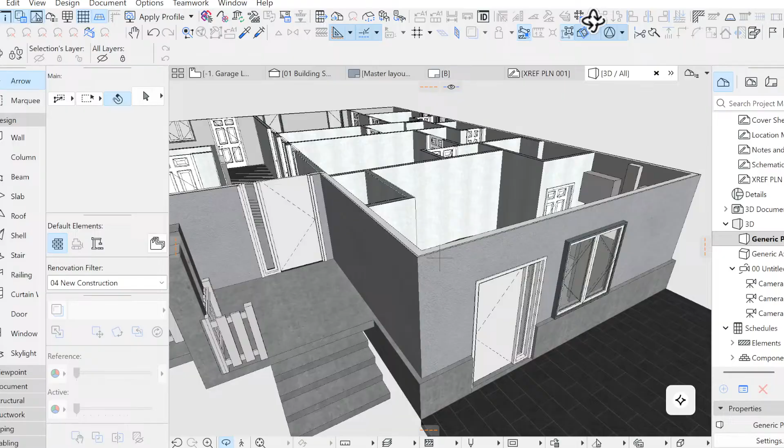So let's actually start designing. That's where the fun part is. So the fun part would be, let me do a quick switcheroo. Okay. All right. So we are here on the model. So this is the home. I am still developing everything. You know, it's missing a wall, missing things, missing finishes, but overall, this home will be transformed.

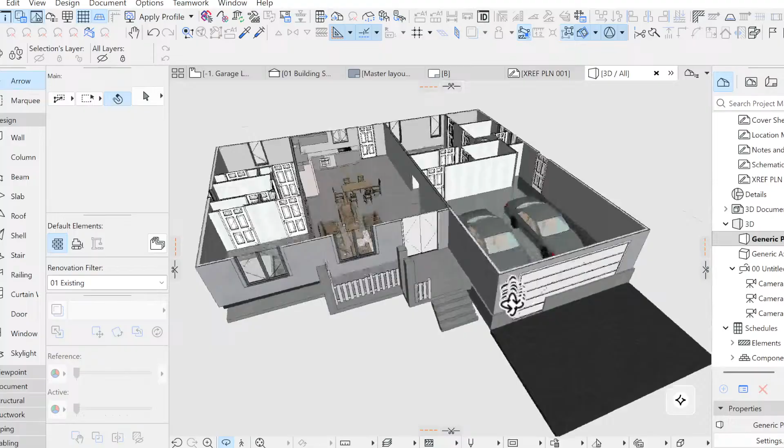So right now, this is where we're at, the end product. But if we were to change the renovation filter to what is existing, this is the home before any changes were made. So as you can see, there's a garage. I need to fix that. And let's do a cut through real quick. So we have a 2-car garage, and then as you enter the space, as you can see, we have those multiple floor layers.

I'm going to fix that. I think one of my floors is on the wrong renovation filter, but that's okay. So we'll just turn that off. That is supposed to be new construction. So as you come in from the front door, you have your living space, you have a dining space, and your kitchen. And then, of course, we have bedroom number 3.

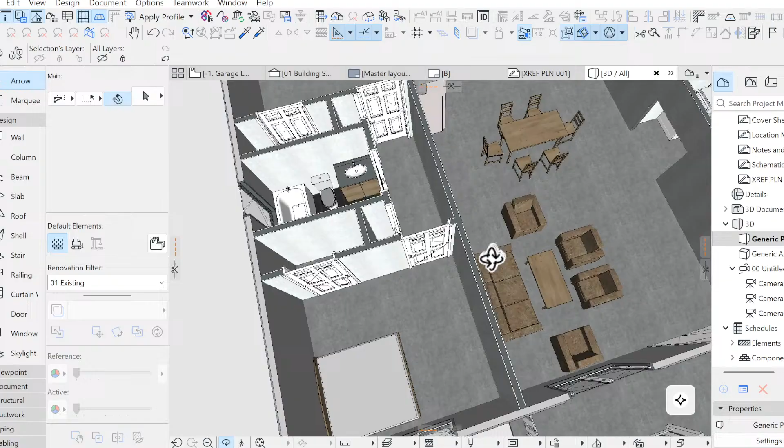Some of my filters did not get saved, and that's okay. It's a quick turn on and off. And then this door, let me orbit around here. There should be an opening. I don't know what happened to my opening, but we'll fix it. But there's an opening here that takes you to the bathroom, and then the bedroom, kitchen, and bedroom number 3, and number 1, the main bathroom.

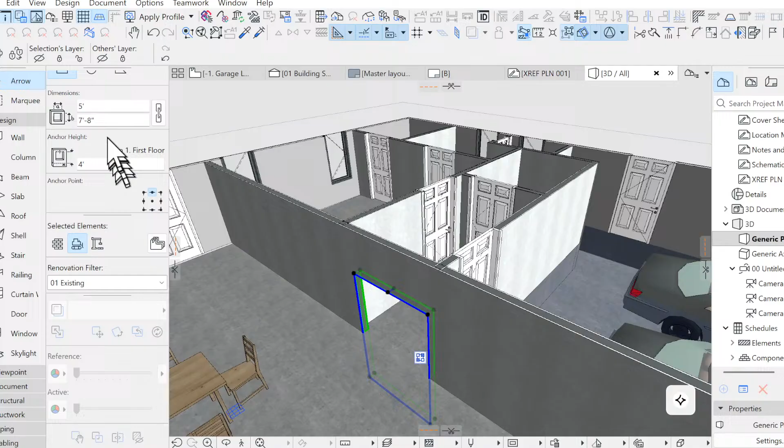And then this here is actually where the laundry room is, but we are now putting that under the new filter, the renovation status. Yep. That's my wall opening, and it got tucked down. Let me see here. That's 8. It's probably 6'8 for a typical door opening.

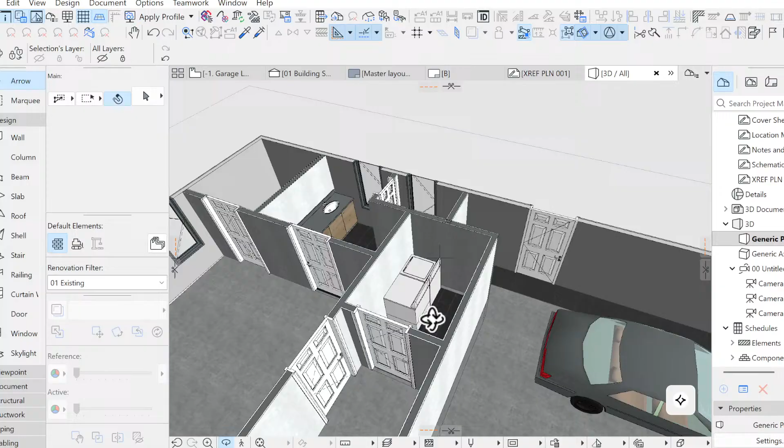So you come down this hall. And you enter through this door here into the main bedroom, and then you have the door to the bath and the door to the closet, and then this door takes you to the laundry room. I'll have to rotate that, and then this door takes you to the garage.

So the garage actually steps down, so the garage is actually sunken down per se. So I decided to kind of keep that feel because most garages have steps. Maybe not as many, but if it did, this is how it operates. So most of the time garages are lower to keep water out, and you want to have the house elevated. And this part of the home will most likely be a crawl space.

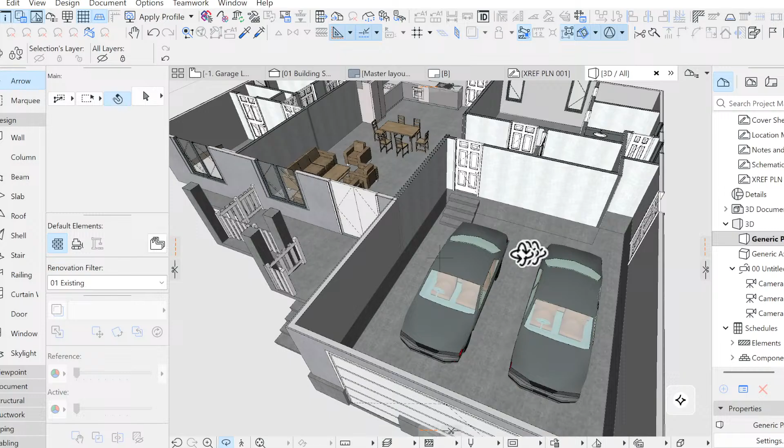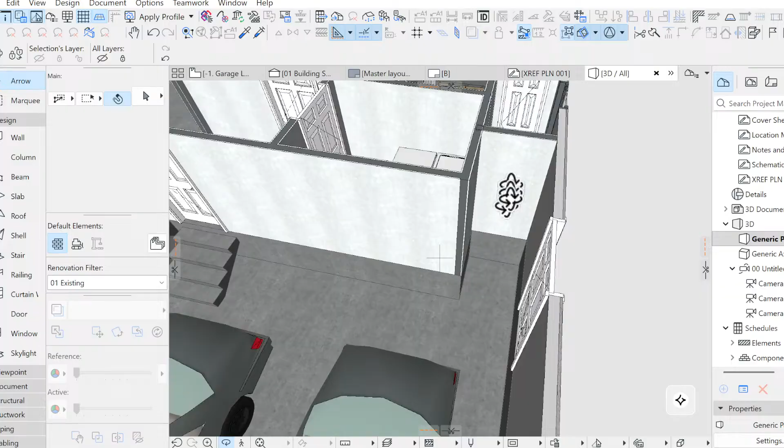And then the garage has this linen area here in this corner, when you enter from the outside on in. So this linen area, I wonder if it will show, but it's actually the new bathroom. So, let's see. Whoop.

So if I were to change my renovation filters to new construction, this is what the garage is now. So the garage, I decided to create a studio-like entrance. So you have a studio here, the door. This is the closet, the one bedroom, and then within that same space, which is very, very tight, is a kitchenette and the bathroom.

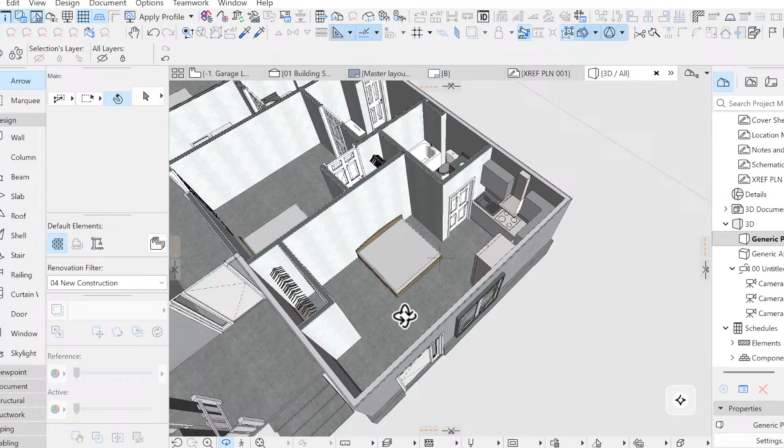So in theory, this section here is separated from the house. They have their own private entrance and exit, and they have their own kitchen. So it's very secluded from the whole home. But if you were to enter the home, the main entrance here, and then in the last iteration, the stairs, the entrance was here. So we need to close that up and make a new entrance for the room to enter here.

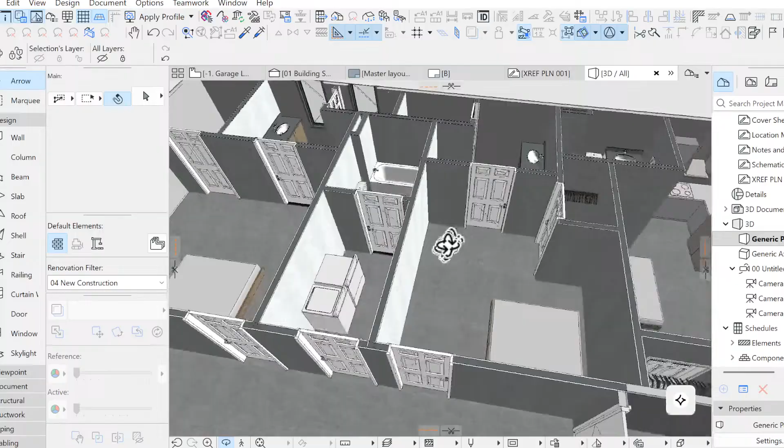So we're gonna utilize this hallway for the laundry room and also the shared bathroom for the other bedroom. I'm still debating if I like that configuration, but I think it works for now. And this is where the bathroom is. So we have the toilet, and it mirrors essentially the owner's suite. It very much mirrors the same layout.

And then all of the plumbing is relatively on the same side of the house. So that's also a win for us. It's not as much work to do. So let's hop into the floor plan and let's just vibe out. That's all we're gonna do tonight. Just vibe and make more floor plans.

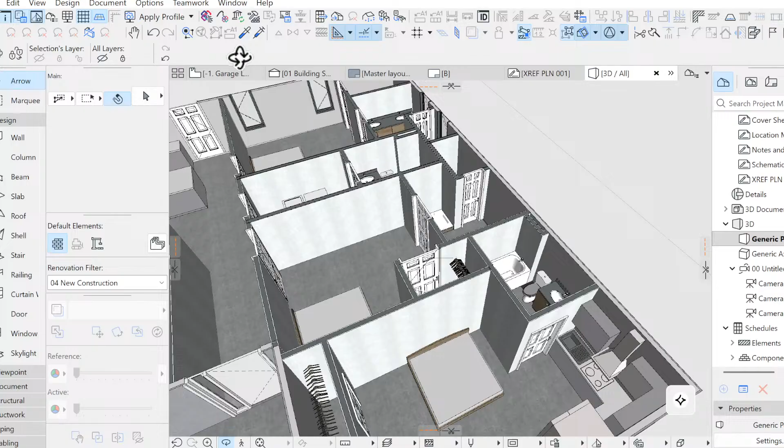So this is our garage level. When I say the garage level, this is actually the level where it is sunken to the ground. Let me turn on my markers. Let's see. So if we were to make a section cut through this garage, this is actually how it looks. So you have the driveway, and then this part of the studio is on the ground floor of the garage,

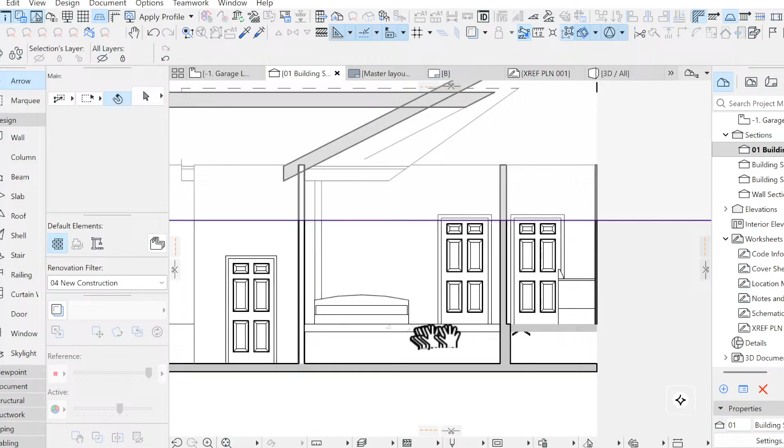and then I elevated the other side of the garage to be on the same plane as the rest of the main home, so it's equal. So you're not walking down to the bedroom. So we raised the floor up. As I start to draft, let me put it on the right layer. Sometimes I just go really fast, but now I kind of know what I want to do. I can now assign it correctly. Sometimes I just model, but we'll fix that.

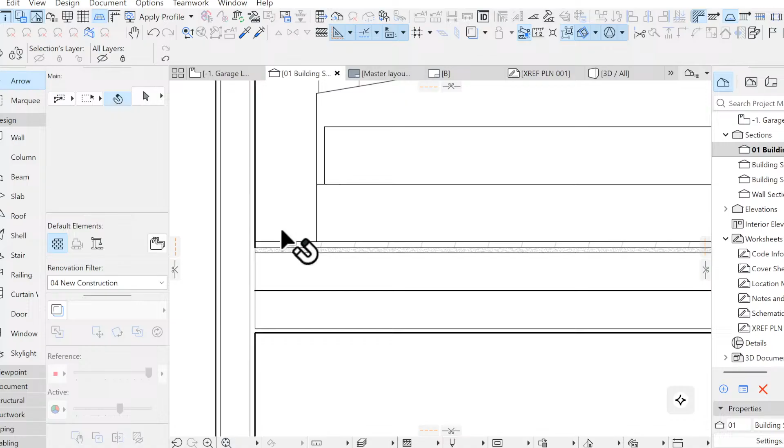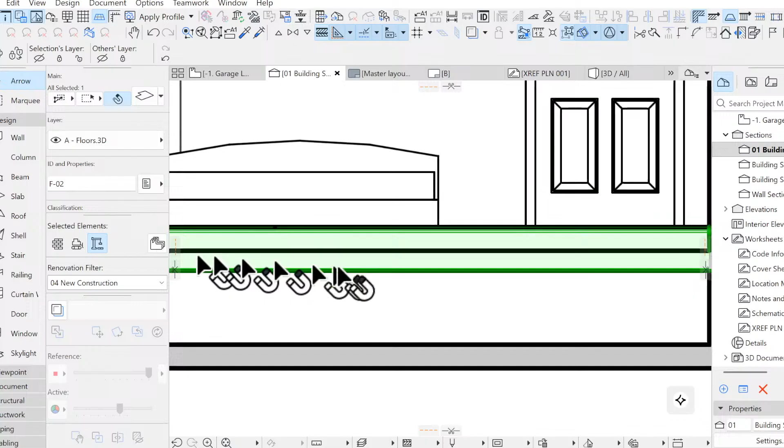So this is actually going to be a composite, an assembly, a floor, and we're going to do flooring and gypsum, and that would give us the right thickness. And then in another view, I will show the floor joists. So right now you can see the subfloor. Let me turn on my line width. So you can kind of see the subfloor, and then this. I'm not exactly sure what that is. It's the same thing, but why is it showing? There's two different floors. Let me see. There we go.

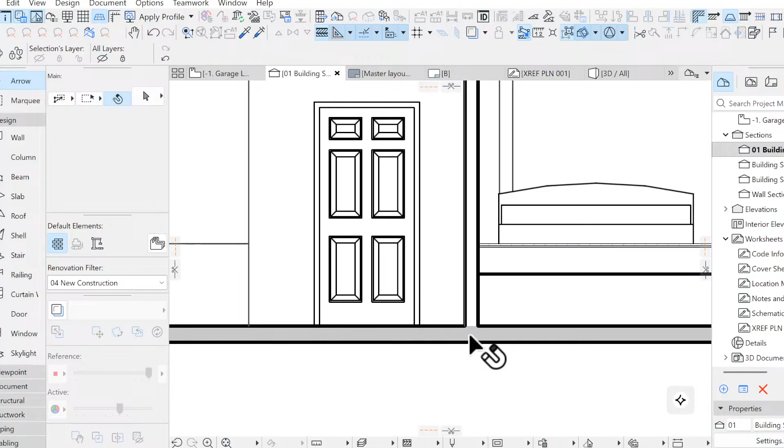Okay, so now we have the hardwood floor, the subfloor, and then we will have our joists, and I will draw that on the layout sheet on that view. So this is the new floor. The gray is what would be remaining, and then the white is the new construction. So we'll be putting a new wall as well. This wall goes slab to ceiling, so I need to add my ceiling, and we'll have to correct this moment at the roof line. But all in all, it's communicating what I ultimately want in this area.

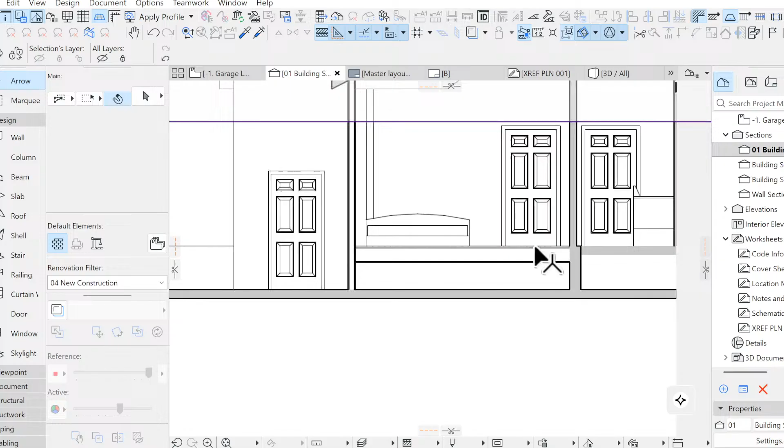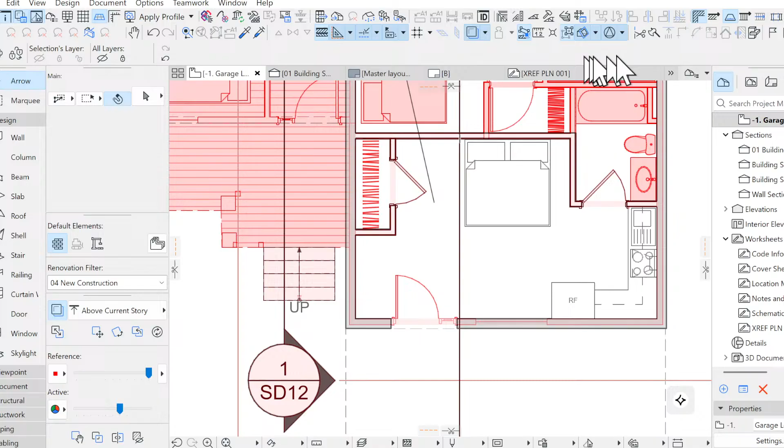So that's the closet. As you can see, the crawl wall is actually thicker than the actual interior wall. That's okay, just need to fix that. Now we're taking another level of scope development and translating it into how it should be shown. But in theory, I just want to focus on this apartment, this suite here. So this is the kitchenette and the window. Let's see. That's another way to keep this as entertaining as possible.

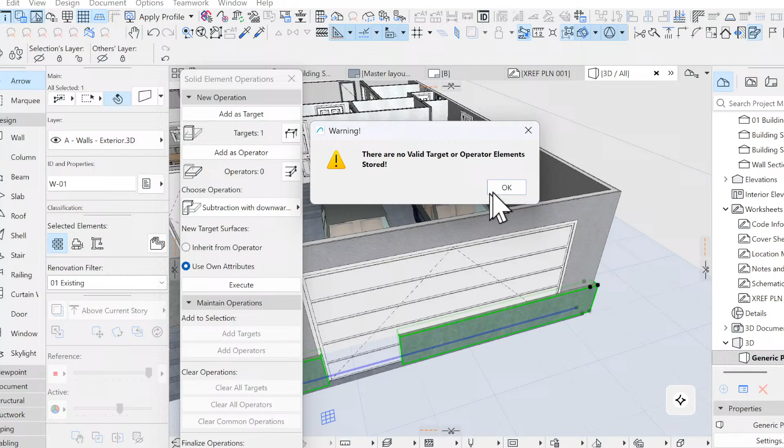All right. So I wanted to fix my garage situation that was happening earlier. So during the existing phase, I use a solid element subtraction tool. So this is my operator, this is my target, and I want a downward extrusion, and I think I got it. Oh, not valid, so it's not intersecting. So what do I do? Okay, so this is going to be for new construction.

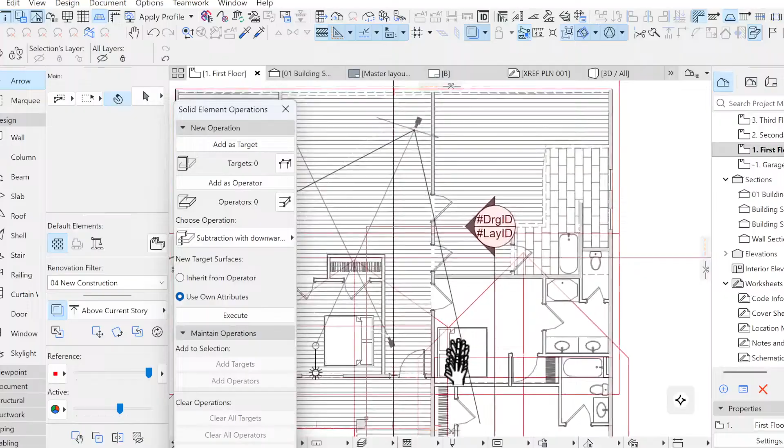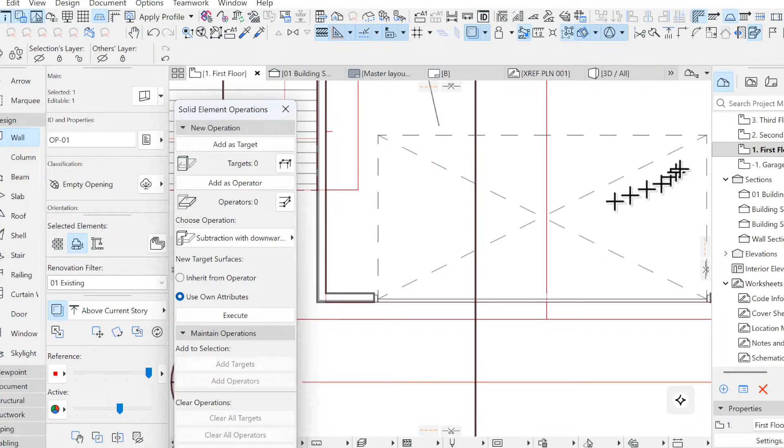So I may not be modeling this 100%, and there's many different ways to showcase it. What I'm gonna end up doing is using the opening tool to show the opening. So let me change this. This opening tool I'm going to utilize also on the garage level. I think it's a window tool. Yeah, it's a window tool.

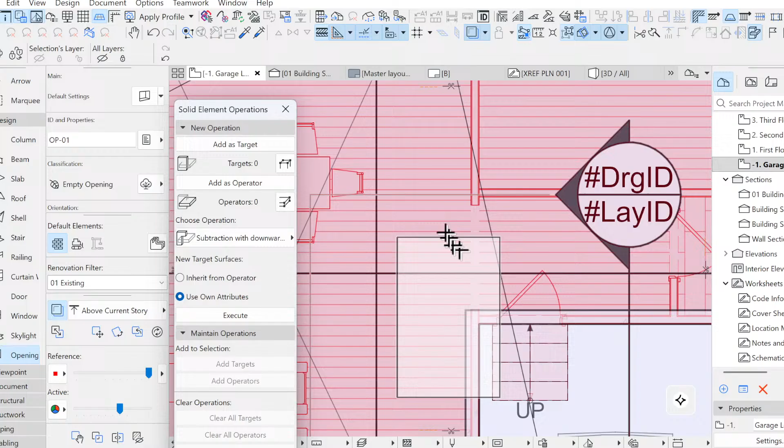All right, you got the, that's what I want. I wanted it on the... There we go. And then this side, we are going to hold down and extend to the other side of the garage.

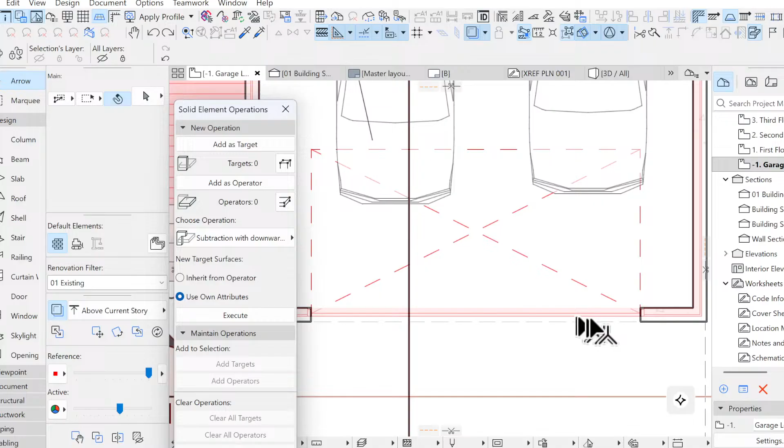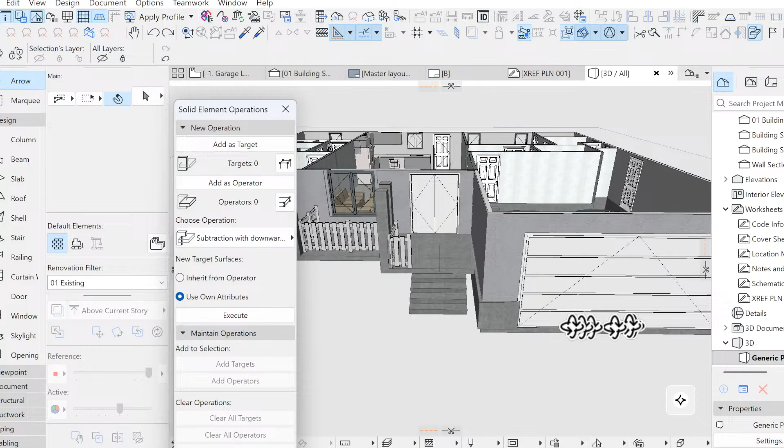And then we can work on our finishes. So this exterior wall should be at least the same thickness as the core wall, the foundation wall. Let's do that. All right. So let's create a wall section. And let's just focus here.

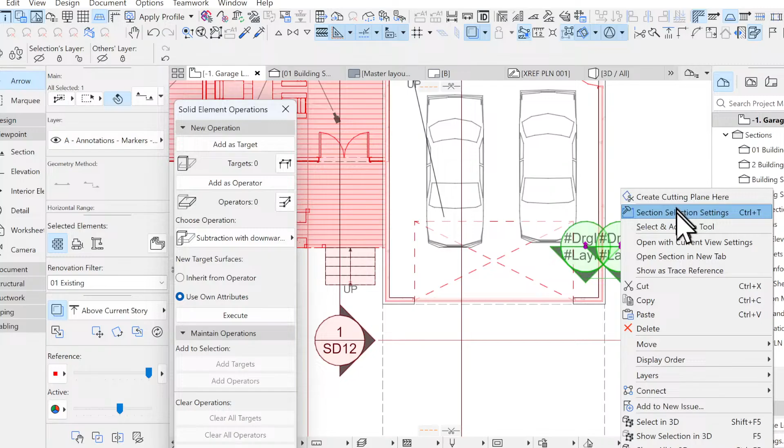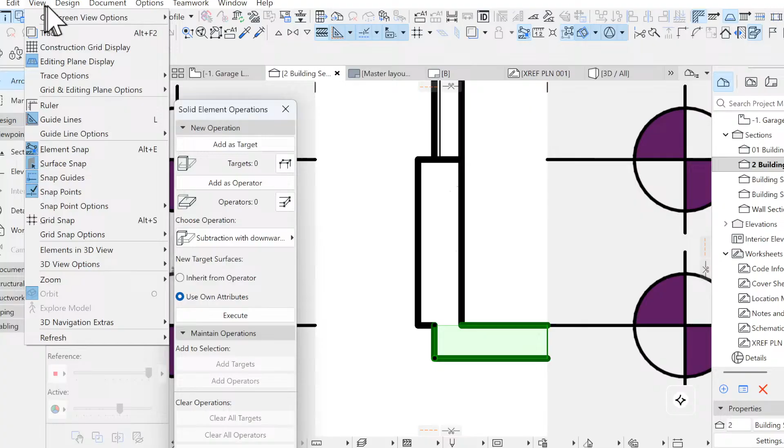So as you can see, this is our typical wall section. This is our floor, but it doesn't need to be on the edge. And then I need to make a foundation floor. So let's go to our stories, to our design, story settings. And let's insert below and call this the foundation. I'm just using rough, say another 3 feet. But again, just follow your local code and everything.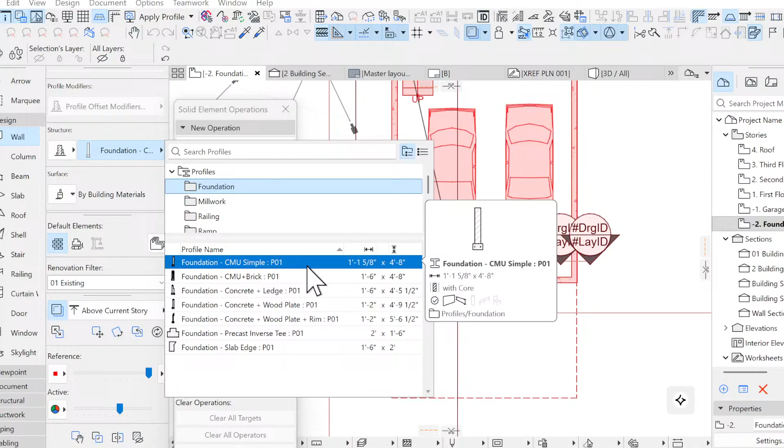So now when I go to my foundation, I want to use my wall type, and I'm going to use the complex profile. And I'm going to use the foundation, the one with a footer. And let's just draw this. I still got to figure out which one of these lines is actually the reference line. But if we go back to our building section, ta-da! So now we have our building section.

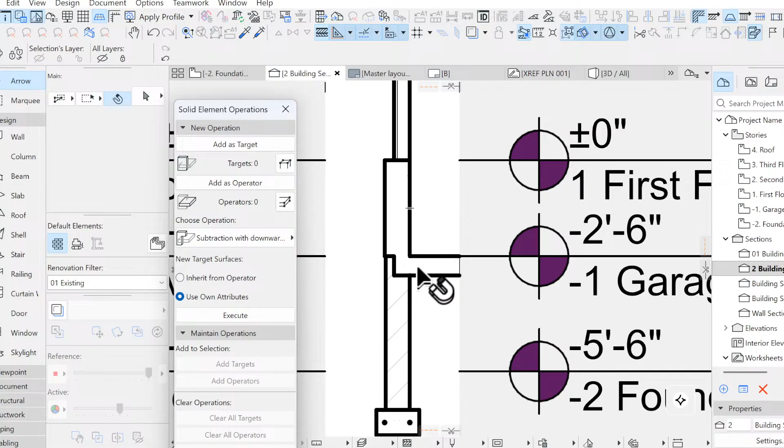This is the foundation. This is our crawl wall, and the floor is actually too far out. So if we go to our show on floor plan and bring our floor line in to the edge of the wall. Now when we go to our building section, ta-da!

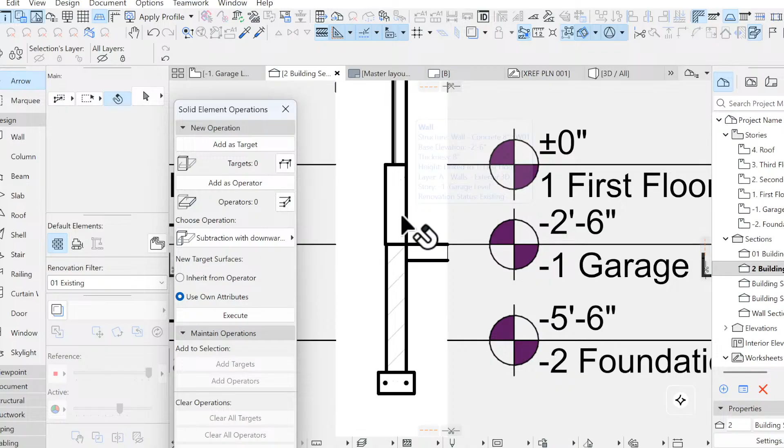So now our wall should be, I think it'd be best to, because we can have the finish on this side, but then we have a ledge on this side, but we can fur it out with drywall. But we're actually going to match. I'm going to change this wall type to maybe a 2x6, and then 5 and 7 inch, 11 inch.

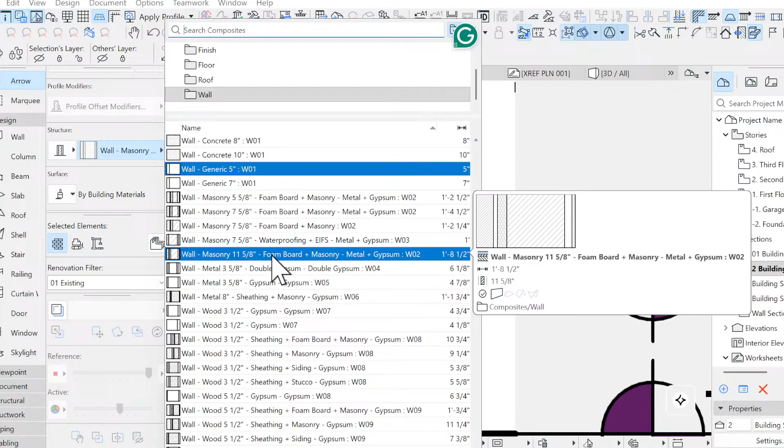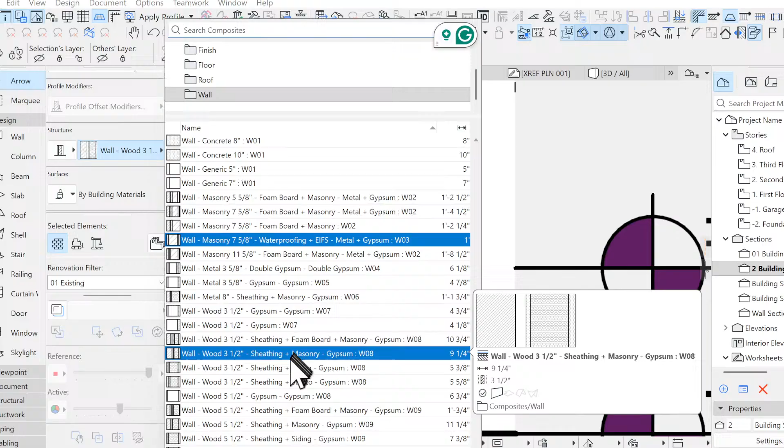Okay, way wrong one. Foam board, double gypsum. We don't need double gypsum. I might have to change the composite. Foam board, 7 5/8, masonry wall. We want a finished garage. Let's see, gypsum, 5.5, 6. Sheathing, yeah.

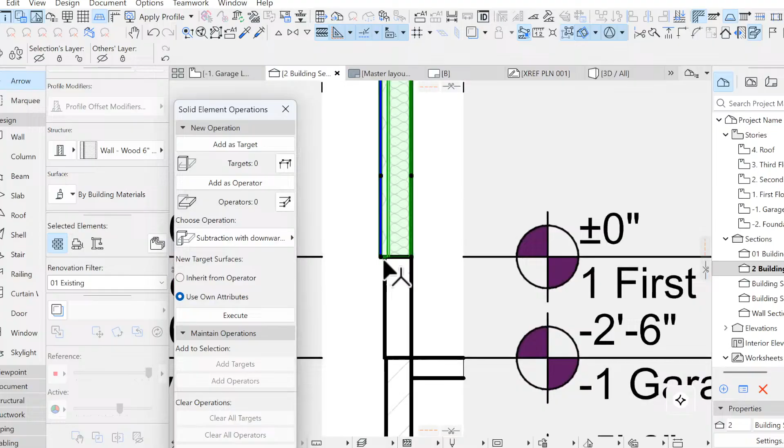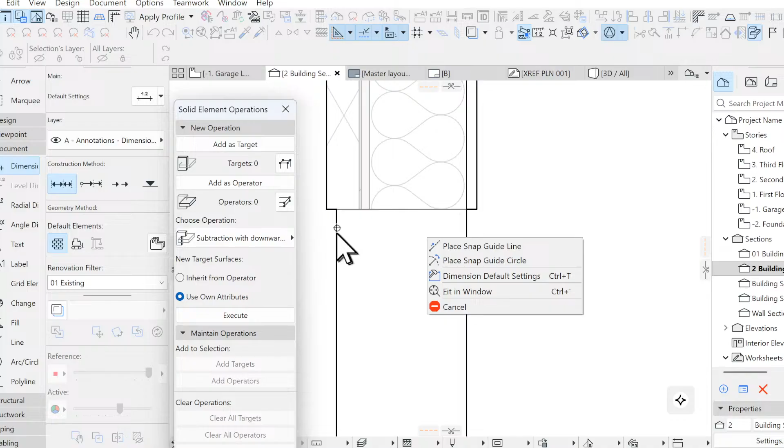So this is our finish. This is our finish. This needs to go out more. I'm actually using the standard wall type that's in the software, so I definitely have to customize this. Which one will do?

So if I go to document and see building composite. So let's see here. We have waterproofing. We have EIFS. I don't like that, but waterproofing, wood sheathing, and then structural insulation, 6 inches. We're going to actually make this 8 inches. That's a lot, I know. Gypsum wall board 5/8 and hit OK.

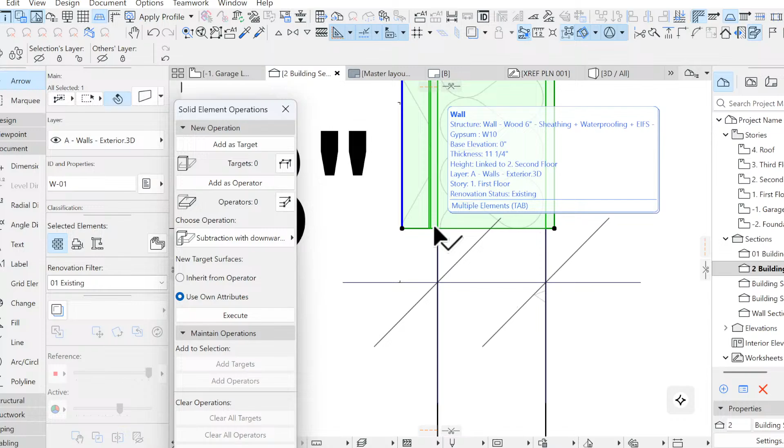Now our wall type should be lined up. This is our 5. It could be probably 7 and some change, but at least our finish will continue down. And then this will be grade. So let me go to building composite. Let me create a duplicate of this one.

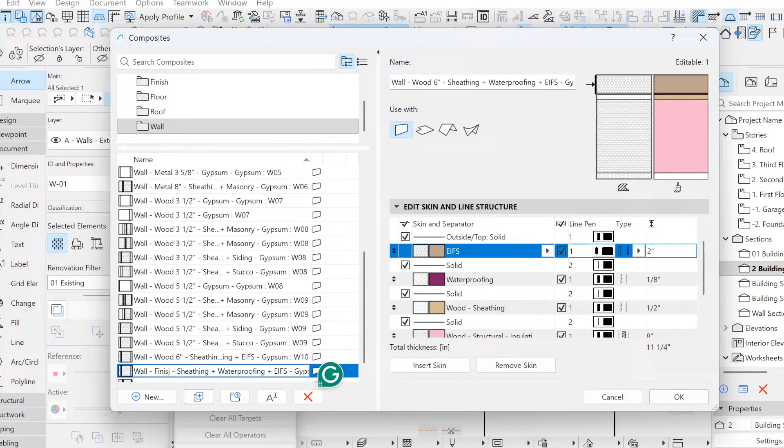Instead of sheathing, finish. Change this to... So we no longer need the insulation. We can remove the gypsum board and just sheathing, waterproofing, and EIFS. So now when we go to garage, foundation level, well, nope, garage, and we put in another wall. And we pick the wall we just created.

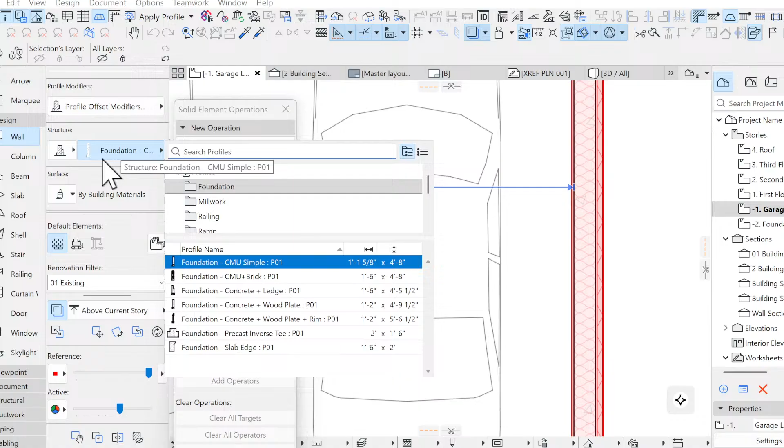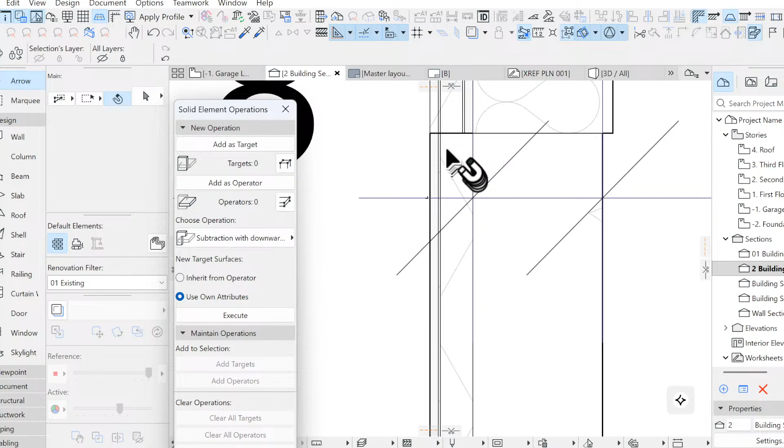Our composite wall finish. Now when we go put our exterior wall down, go to our building section. Now what we'll see is, ta-da! Our new wall, our finish wall continues on. It continues, but I need to...

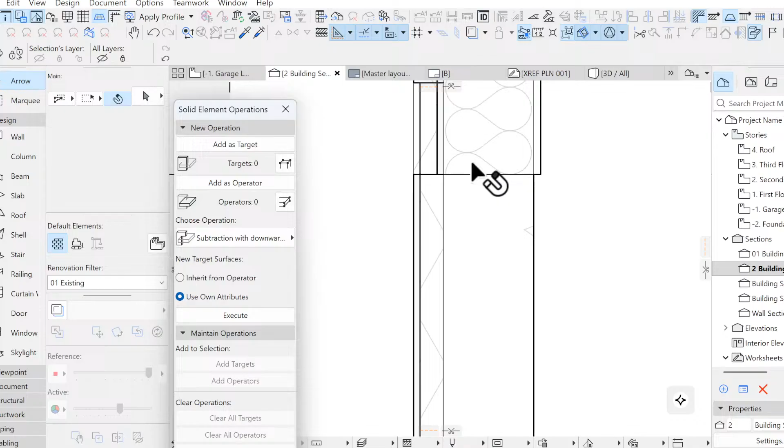And then there'll be blocking, a sill plate on the foundation to the insulation. So that'll be exactly like that. But I think I'm getting mixed up here. So this is the wall we just placed. This is the wall all together.

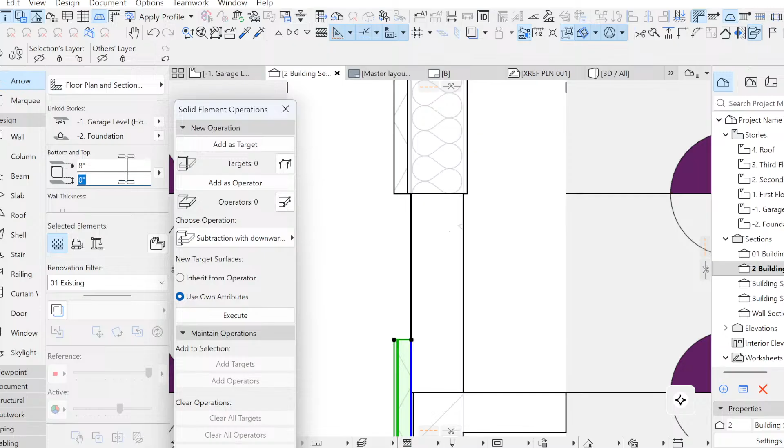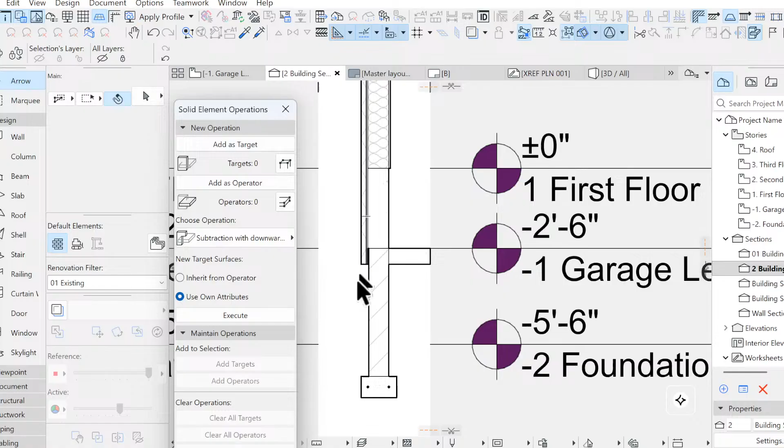I think I have it backwards. So let me flip this. So now our exterior finishes continue on down, probably about 8 inches extended, and then our floor.

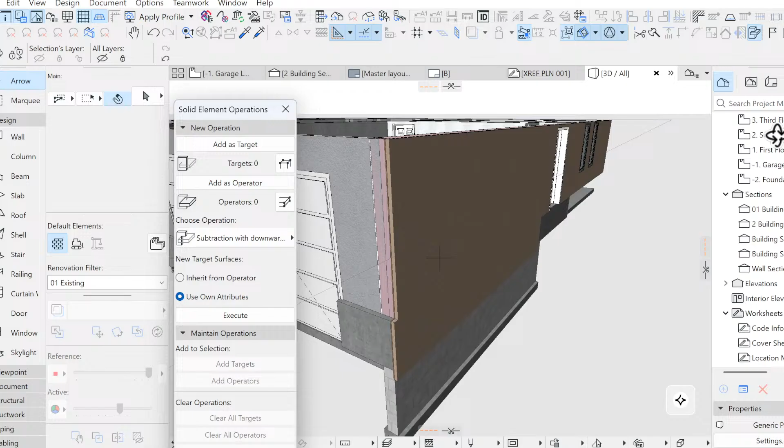So if we were to look at it, we have our garage wall and our finish that continue on down, and then we have a foundation wall, and we can add our dirt. I can definitely do that to help explain this. So let's see here. Slab tool.

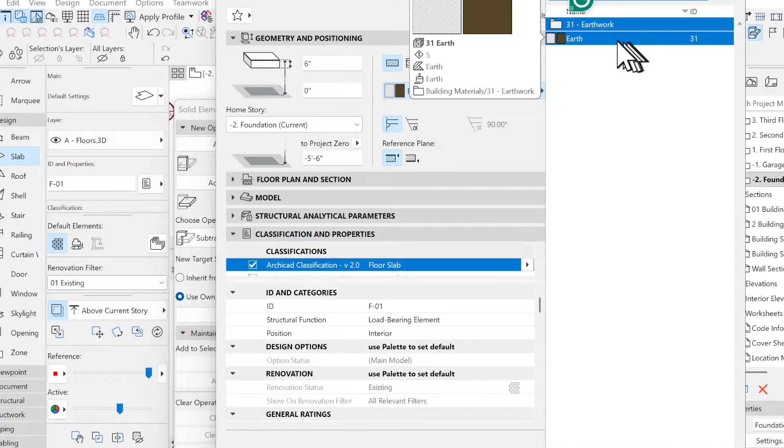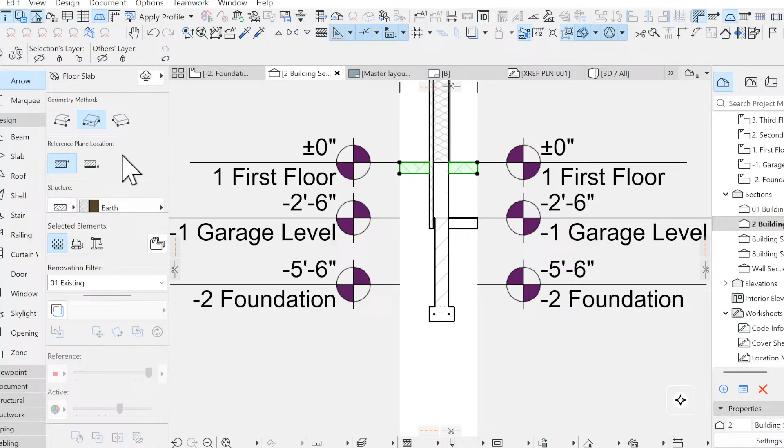All right, and then we are going to make this a single. We're going to make this dirt or earth. And going to make this 0. Oops. Make this like 10 feet.

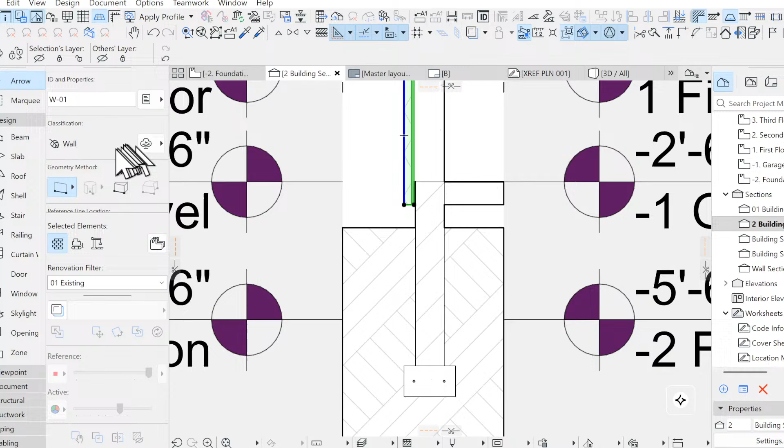And the ground level is actually, let's go 2. This wall should extend below 8 inches. 2, 6. Not 8 feet, 8 inches.

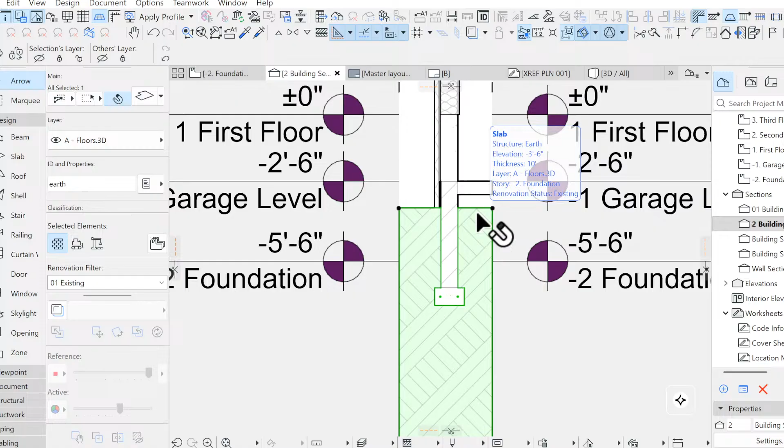And then crawl space. So actually, that is the foundation wall. This is the floor, crawl space. I think I need to sketch this out, but that's all right.

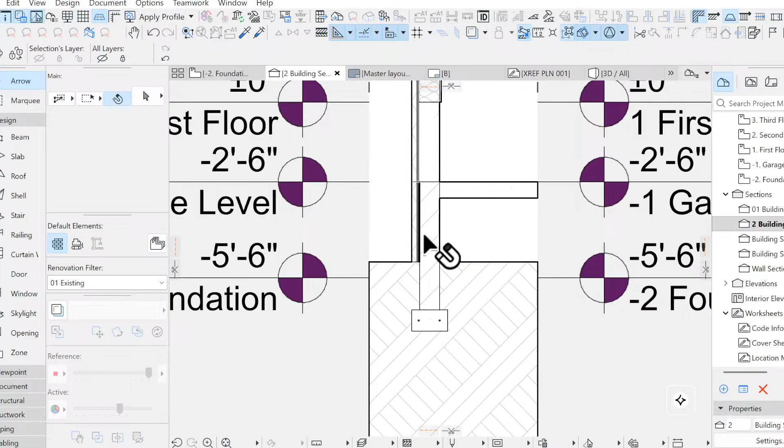You can do your floor joists, and then this is a wall continuing up, and we have our sill plate, insulation and wood framing, and then this is our exterior finish. And then I have to do our ceiling and then our ceiling soffit. So I think it's coming along. It's gonna take some more drafting.

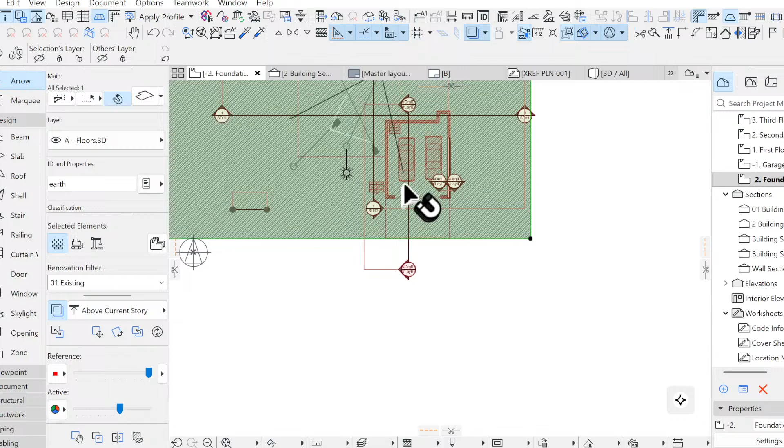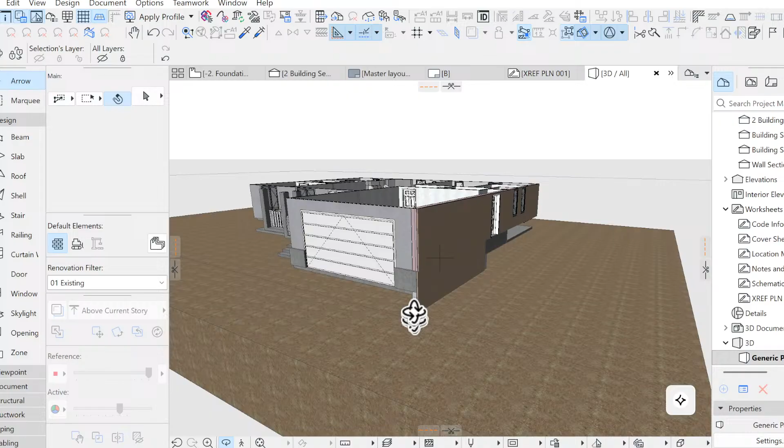So I think what I'm gonna do for keeping it clear in future terms is to. Oh, what happened here? So, this is dirt. I think I'm messing it up. I think this is the floor line. Yeah, the dirt on the inside, I have to make an element subtraction tool. The dirt is actually higher on the outside compared to the inside.

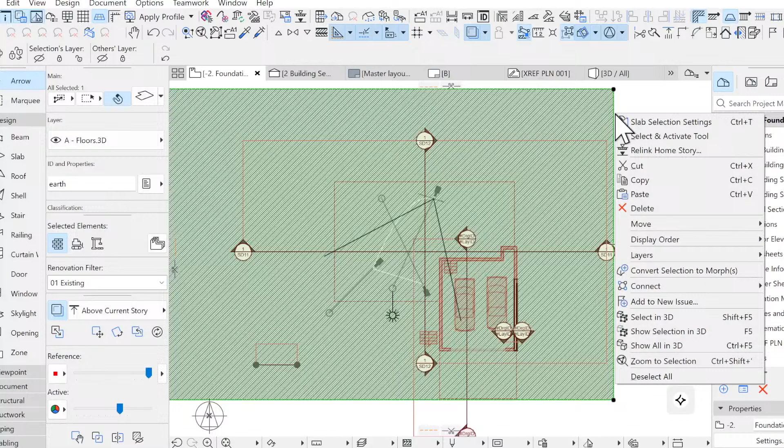So if I was in my foundation plan and turn off this cover fill so I can see it. So what I will ultimately end up doing, choose reference, and I want to show previous stories. So if I was on level 1, then I go back to foundation. What I want to do, another slab, but this would be used as a morph.

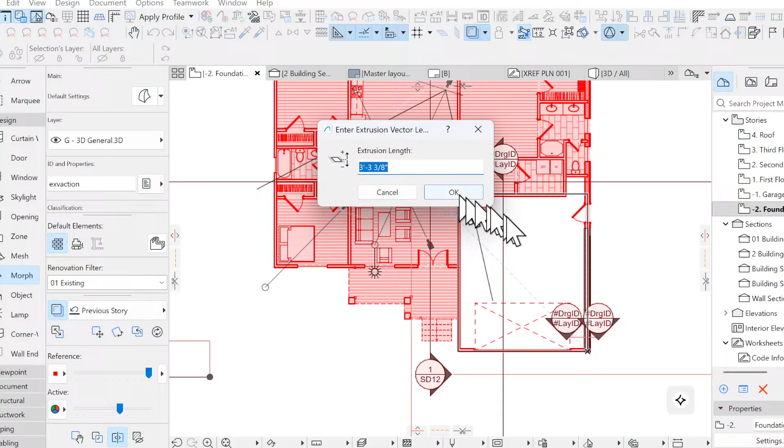Shouldn't extrude it yet. I should just do it flat and then extrude it. Let's just focus on the garage. So if I go back to my building section, and this is my morph I drew, and the ground is actually, and then you want to slope it, but of course, let's say,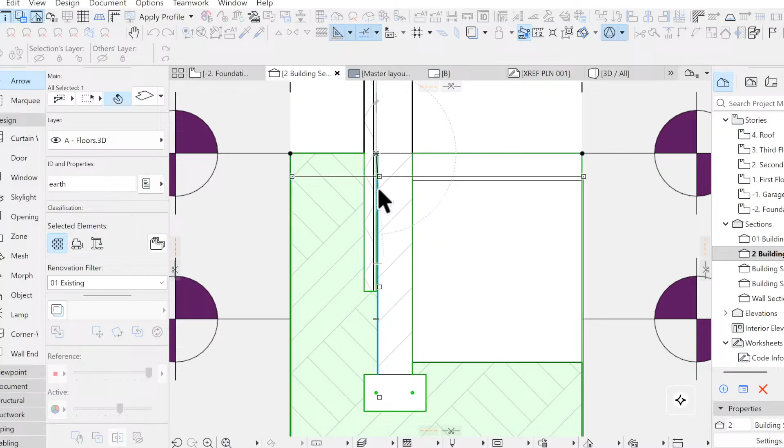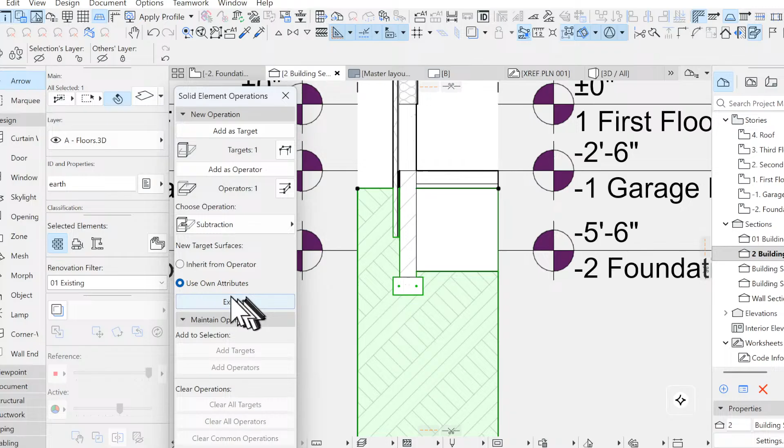So this guy, this is the ground. That black line is showing the ground, right? But what I wanna do is use my subtraction tool, and I want to make this the operator. I want to make my ground the target, and I want to extrude up and execute. So now the ground line is here, and I can make the.

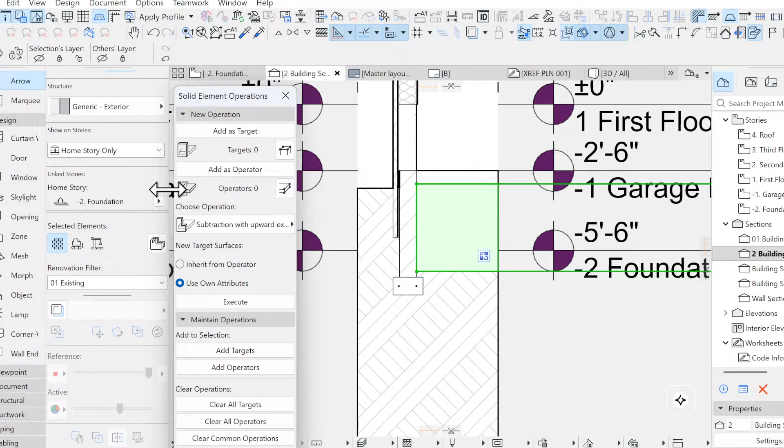I wish there was a way to change the thickness. Let me go to the settings. Down 9 inches. Is there a way to change it? 6. How do I change? Let's go to 3D. So this is our excavation fill. I want this here.

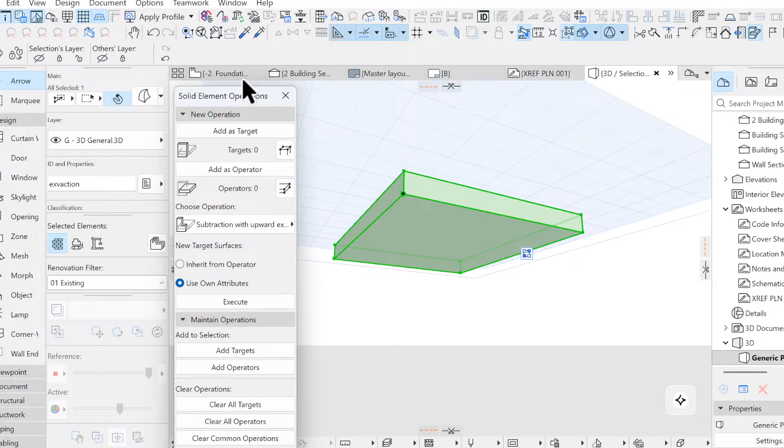Now when I'm in my section, the ground on the outside is higher, and then this is our crawl space, and this will be where all the HVAC and ductwork will be running. But we need ventilation, so I might need to lower my ground line. I need to draw this.

Modeling and talking and streaming is interesting.

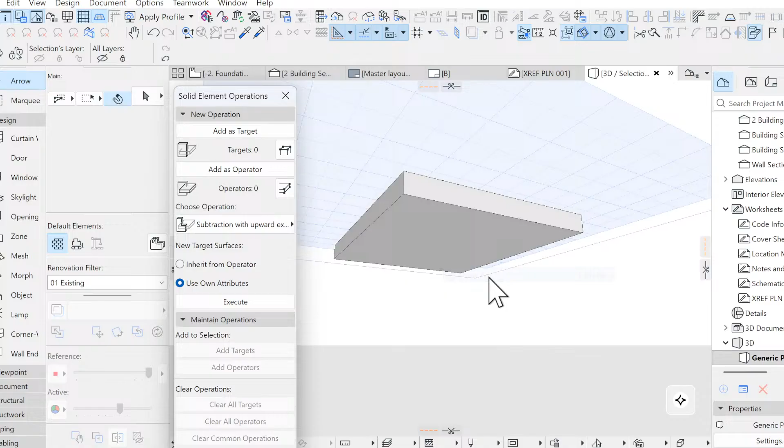But all in all, so this is where our ductwork will be. This is now where our ground line would be, and this is our foundation, and this is our exterior wall. So if we go to 3D and we show all, and let's add a cutting plane on this side.

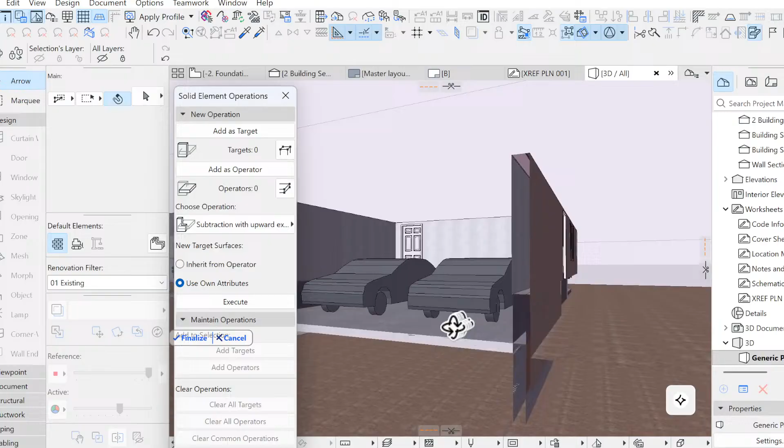So what's happening here is, so our car floor, oh, I didn't hit okay. So, okay. So this, it can also be slab on grade. I've seen that too. But let me go to settings and make this an air. I can also.

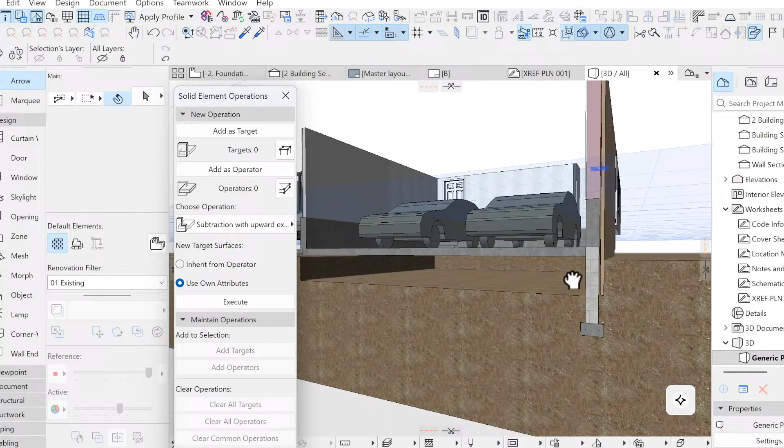So this is our crawl space. We are going to add a rebar foundation. I'm wondering, it would be like a 4-inch concrete finished floor, and then you have your crawl space underneath. We have a foundation wall, and our finish. And let's bring that up.

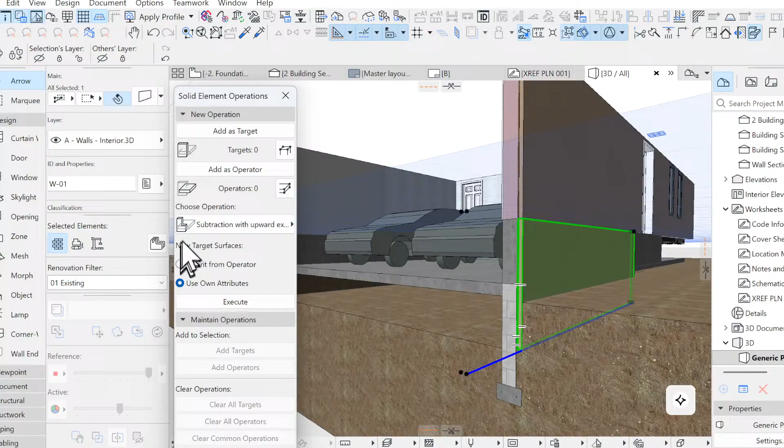So on the next stream, I'm going to showcase the detail. I'm going to draw the detail, sketch it, and get all the components. Because sometimes when I'm modeling in my grade plane, I just kind of get myself tangled up. But that's okay, because that's why I used to always sketch and draw and then model. So when you model, you don't have to overthink and think twice. But lesson learned, trying to stream and model, well, I will get the hang of it.

But that is tonight's session, design number 7. Next week, we're going to go more into the wall details of that garage, and do more technical. I think that might be a good point.